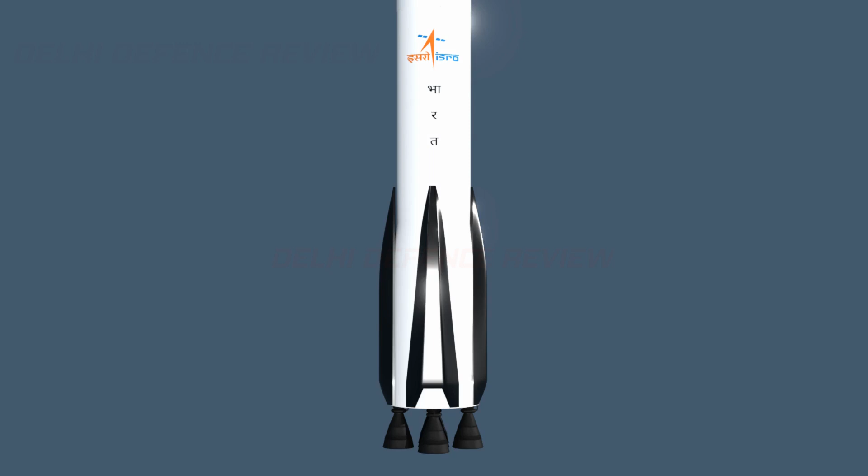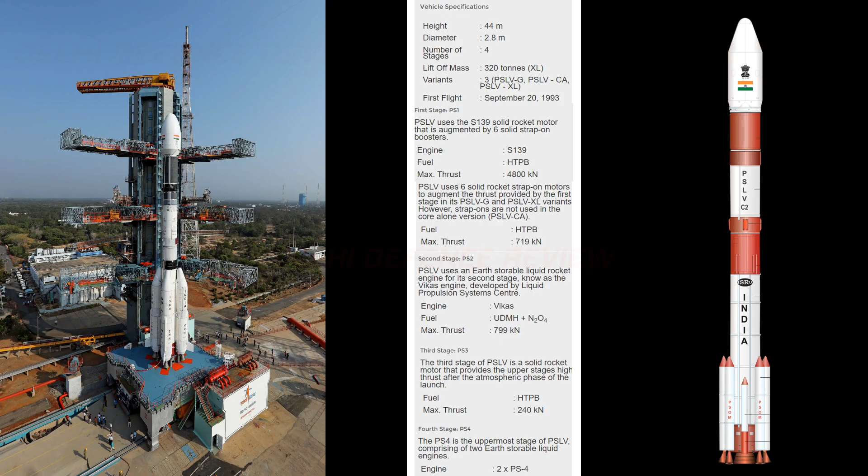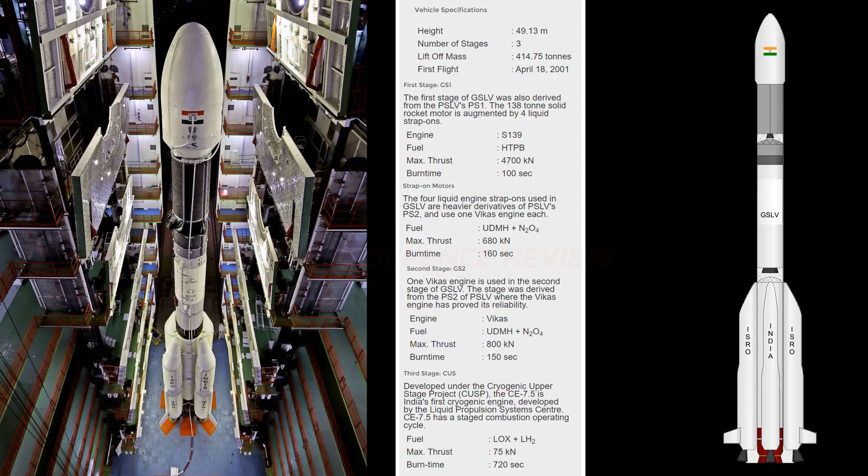India's current satellite launch vehicle workhorse is the PSLV, or Polar Satellite Launch Vehicle, which can launch 1.7 tons to SSPO orbit. On the back of successful development of cryogenic engine technology, the GSLV, Geostationary Satellite Launch Vehicle, has also emerged as a launcher that can place a payload of 5 tons to low Earth orbit (LEO) or 2.5 tons to GTO. The cryogenic upper stage in the GSLV has a CE 7.5 engine which burns liquid hydrogen with liquid oxygen to generate 75 kilonewtons of thrust.

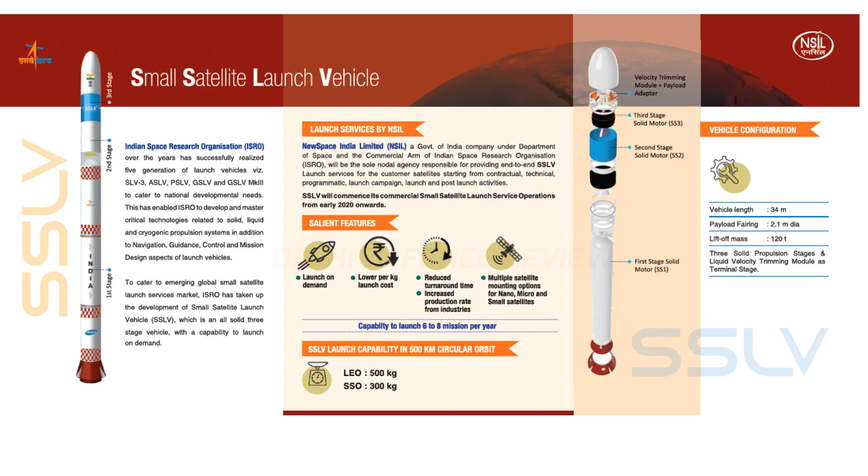ISRO will also start launching satellites using the Small Satellite Launch Vehicle, SSLV. This 3-stage solid rocket motor propelled launch vehicle will be able to launch 500 kilos into LEO and 300 kilos into SSO on demand at a very low cost. It will cater primarily to the global small, micro and nanosat market.

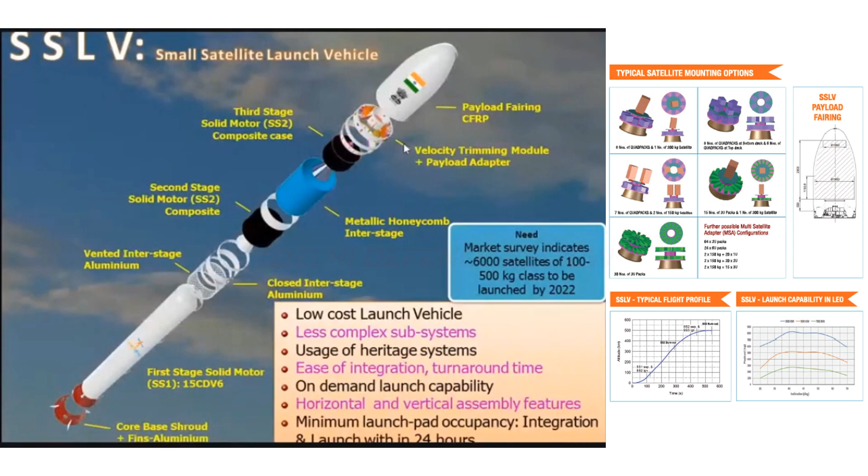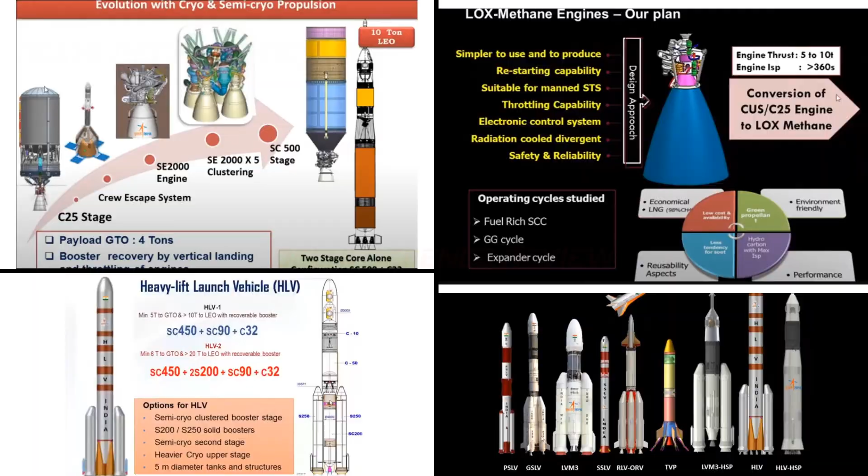Going forward, ISRO plans to develop new engines and heavier launch vehicles, with a plan to launch more than 10 tons to LEO. TSTO, or two-stage to orbit, has been the goal for many launch agencies. Launching payloads and then returning to Earth, where they will be refurbished within a short period and then reused, has been the aim for next generation launchers.

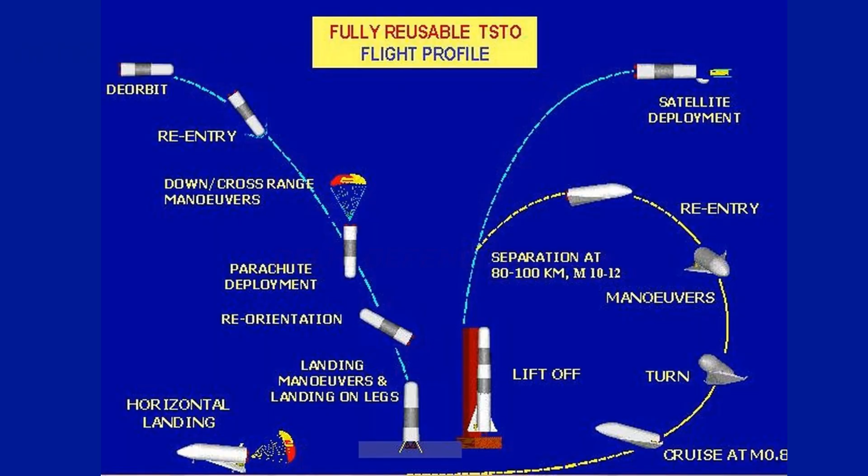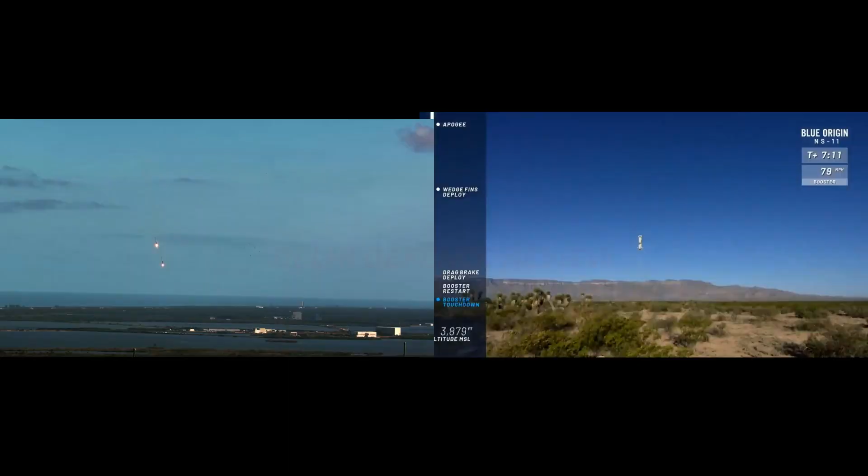Private companies have taken a lead in the area of reusable launch vehicles, with SpaceX's Falcon 9 as well as Blue Origin's New Shepard, which have proven boosters that return to land, which can be serviced and reused.

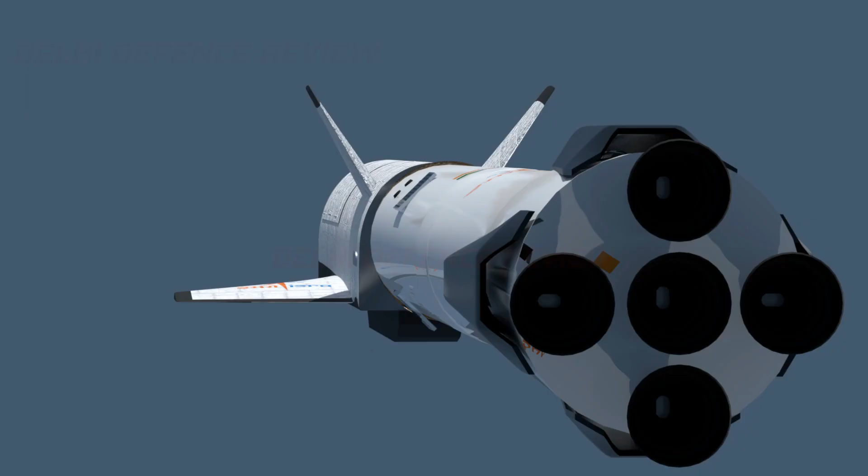Among the multiple plans studied in ISRO for a full-fledged reusable launch system, one of them is this configuration. It is a two-stage system with a first stage called Admire that will return to the ground after stage separation, seemingly similar to the SpaceX Falcon 9's first stage. And the second stage will be the full-scale wing body vehicle, the RLV.

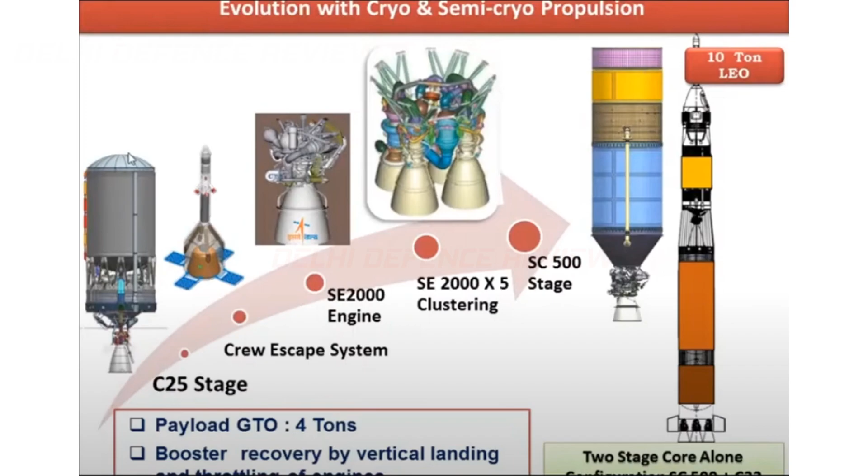ISRO hasn't yet finalized the configuration for the RLV, but the front runner is this one. It will be powered by a reusable semi-cryo SC500 engine with a 500-ton propellant loading of LOX kerosene combination, and a cryogenic orbiter with a C50 engine, with the top portion landing separately using thrusters or parachutes. The aim is to deliver a payload of 10 tons to low Earth orbit.

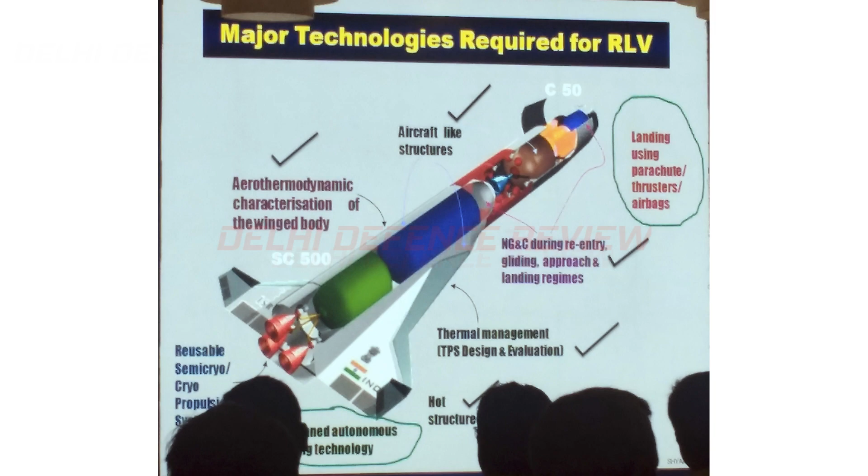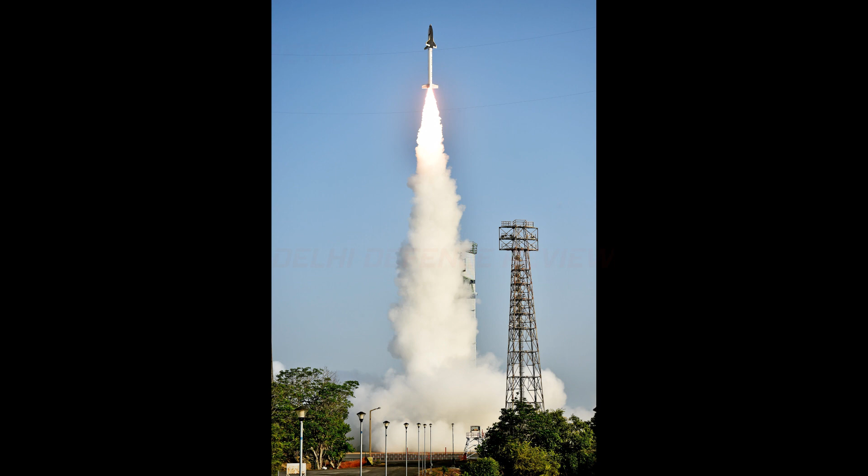ISRO began working on a scaled-down wing body technology demonstrator testbed called the RLV-TD to develop critical technologies required to build a reusable launch vehicle. This TD would enable studies on hypersonic aerothermodynamics of a wing body, evaluation of thermal protection systems and hot structures, as well as re-entry guidance, navigation, and control.

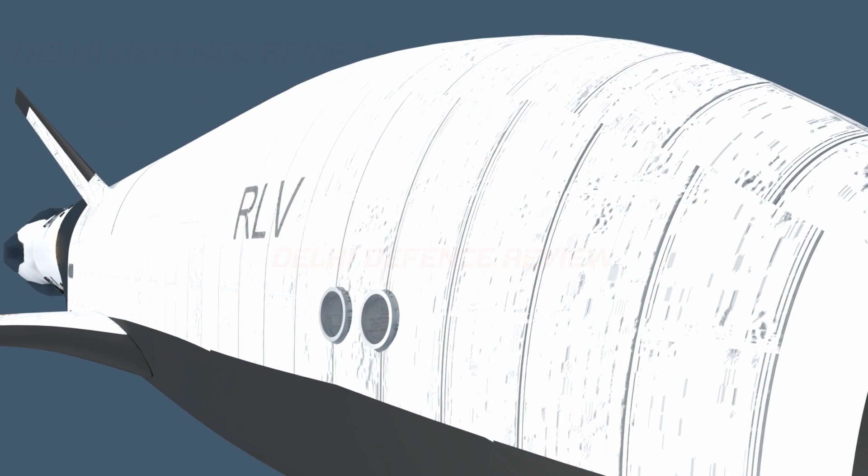ISRO planned to perform test flights to evaluate these technologies developed for the RLV with a hypersonic flight experiment (HEX), landing experiment (LEX), return flight experiment (REX), and a scramjet propulsion experiment (SPEX).

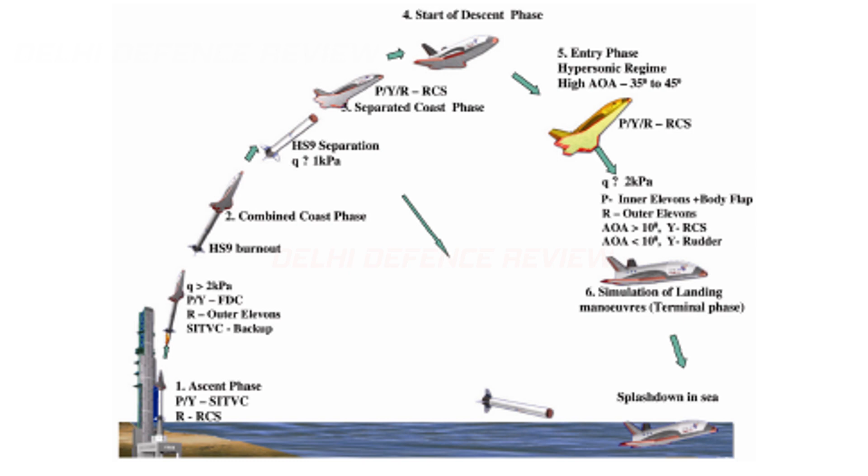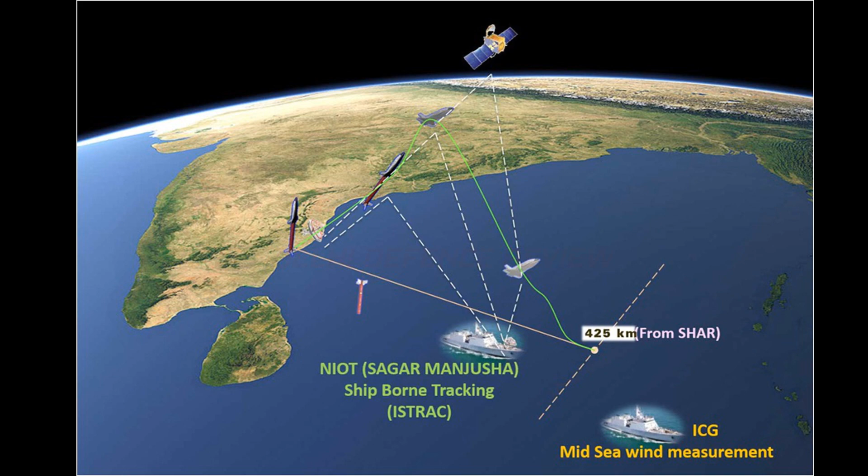ISRO conducted the hypersonic experiment on May 23, 2016 from Sriharikota. After a vertical rise to clear the tower, the vehicle followed an optimum wind-biased gravity turn trajectory till booster separation. The booster burnt out at 96 seconds at 33 km altitude. After burnout, the booster and the TDV continued in a combined coast till the dynamic pressure fell sufficiently to allow for a safe separation at around 44 km.

After separation, the TDV continued its unpowered coast to a peak altitude of 65 km and then started the descent mission. During descent, the vehicle flew in a predetermined optimum Mach versus angle of attack program till it reached Mach number 2 at around 20 km, from where the closed loop guidance took over and a safe touchdown in the Bay of Bengal around 425 km from Sriharikota was achieved.

The TD performed hypersonic flight and then a simulated landing at a height above the water surface, sending back images prior to hitting the water. Let's take a closer look at the TD now.

Some of the key challenges in arriving at a configuration for the TDV were meeting a required lift to drag ratio at hypersonic to low subsonic Mach numbers with a wide range of angles of attack, to limit the deceleration levels and wing loading, as well as achieving sufficient downrange and cross-range control. Longitudinal, lateral and directional controllability using control surfaces, elevons and rudder, in the high dynamic pressure region. Reasonable lift to drag ratio at low speeds to limit sink rate before landing.

Leading edge heating, as well as minimizing the center of pressure movement with change in Mach number. Sizing fin during ascent and ensuring controllability in all axes. A flat fuselage surface on the windward side allows placement of tiles and possible air-breathing engine integration in future. Sufficient fuselage volume to accommodate all subsystems was a given.

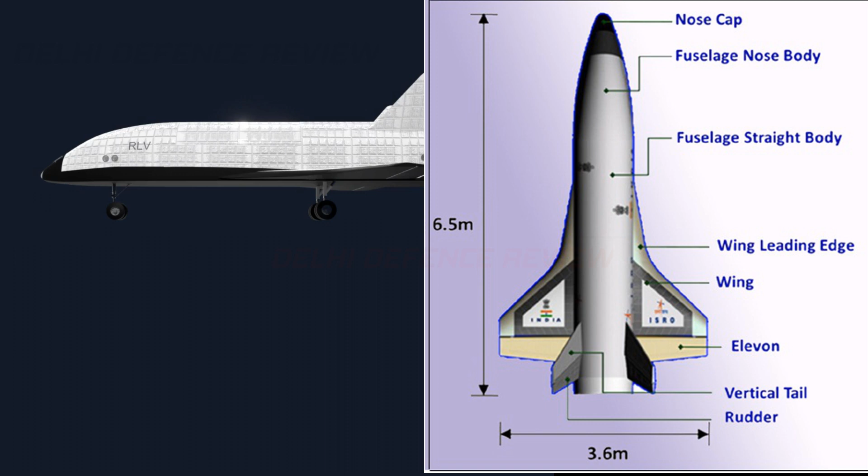The TDV is an 1800 kg wing body with double delta wing having a hypersonic L/D ratio of 2.5. The TDV configuration was arrived at after 2 years of studies and design work. The wing body configuration was selected to provide high aerodynamic efficiency. Lifting bodies have low lift to drag ratio and hence low cross and downrange gliding ability. On the other hand, wing body configuration has high L/D ratio in subsonic as well as hypersonic speeds, which gives better cross and downrange gliding ability.

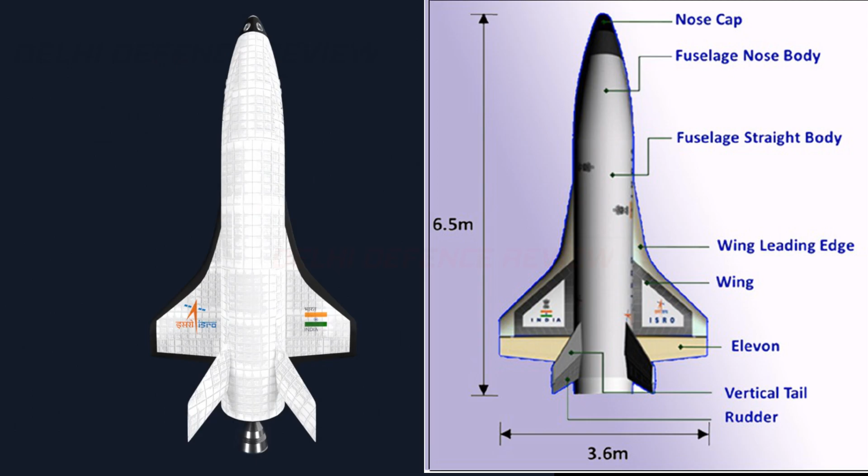Many configurations with a single fin were considered initially, akin to the Space Shuttle. A fuselage with ogive shaped forebody, low aspect ratio double delta wing, and a single vertical tail was the first configuration for which extensive wind tunnel testing was carried out. A drooped nose was designed to facilitate a future manned requirement if needed.

Detailed assessment of each configuration and aerothermodynamic characterization was carried out using in-house developed engineering methods, computational fluid dynamics tools, and national wind tunnel facilities.

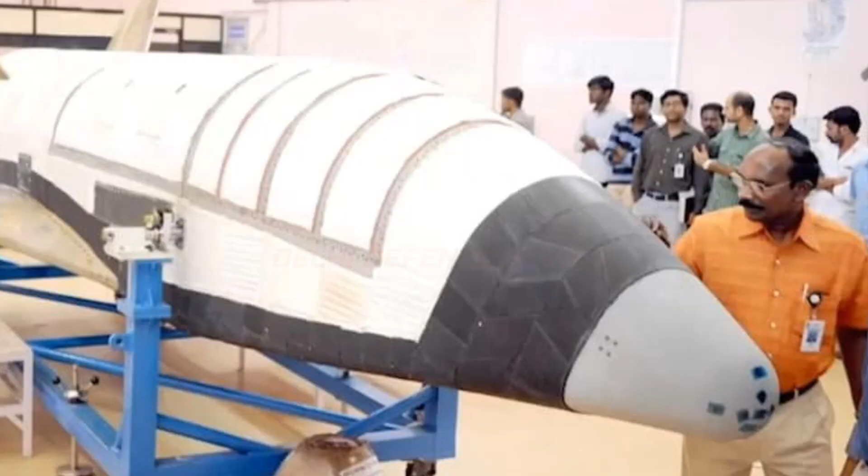For better longitudinal stability and reduced directional instability in supersonic and hypersonic regime, a blunt, canted ogive nose cone was chosen for the forebody. Elevons, which combine the function of elevator and ailerons, perform pitch and roll controls.

At high angles of attack, a single vertical tail was found to be directionally unstable. So twin, swept canted vertical tails with double wedge airfoil section was chosen to improve directional stability and controllability at high angles of attack. The rudder also acts as a speed brake and for pitch trim during supersonic speeds, similar to the Su-30 MKI.

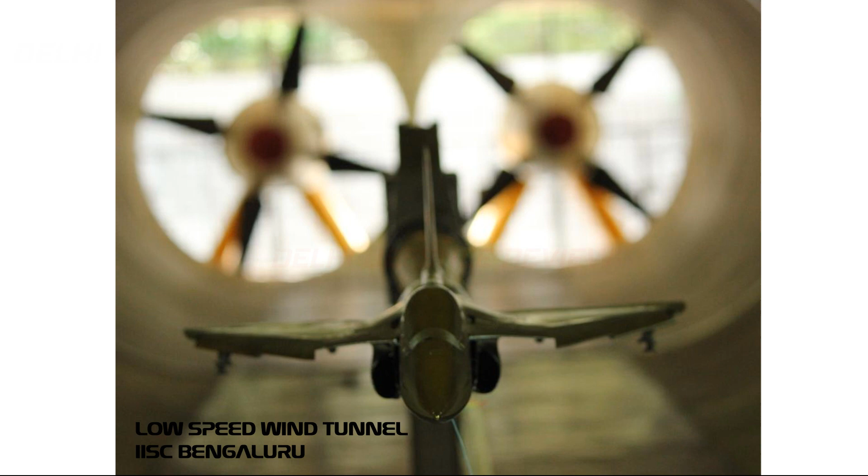For RLV characterization, a 3 meter by 2.5 meter low subsonic speed continuous wind tunnel at IIT Kanpur, a 4.27 meter by 2.74 meter low speed wind tunnel at IISc Bengaluru, a 1.2 meter trisonic wind tunnel at NAL Bangalore, and 0.25 and 1 meter hypersonic wind tunnels at VSSC Trivandrum were used.

17 scaled down models were fabricated and tested.

The wing airfoil was derived from NACA 0012 with flat bottom surface. The reflex airfoil is S-shaped with negative camber for the aft 20% of the chord length, to reduce the pitch down moment and bring it close to zero about the aerodynamic center. The airfoil thickness to chord ratio was varied from 10 to 12% from root to tip of the wingspan.

The wing planform area was reduced without sacrificing lift requirements. The wing has a double delta planform with 80-degree leading edge strake angle and 45-degree main wing leading edge angle. The 80-45-degree wing planform delays the wing stall and reduces the center of pressure movement over the operating range of Mach numbers. The wing has an aspect ratio of 2.16.

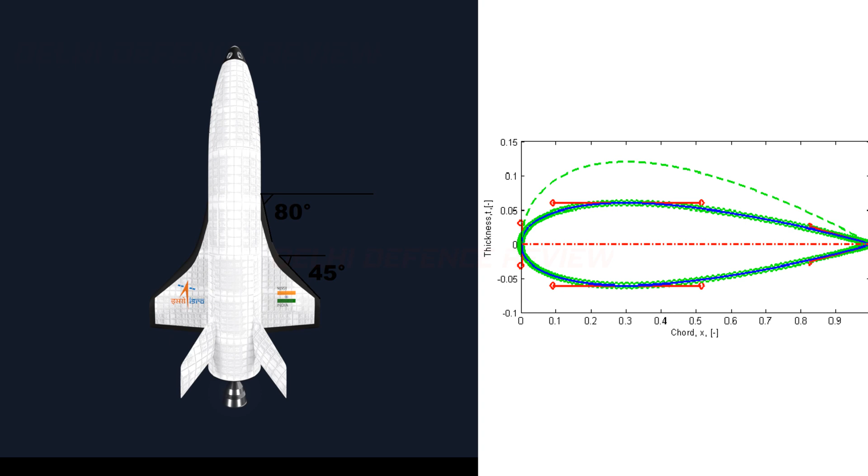A 3-degree dihedral angle means the wing tip section is at a higher level than the wing root section, and the wingspan is 0.55 times the vehicle length.

Reaction Control System (RCS) thrusters provide 3-axis control during low dynamic pressure conditions. Pitch RCS thrusters are placed in the aft fuselage top and bottom surfaces, yaw thrusters at the aft fuselage side panels, and roll RCS thrusters in the top and bottom surfaces of the wing.

The fuselage has a blunt ogive forebody followed by a D-section fuselage. The D-section with semicircle top and a box-type bottom makes TPS, Thermal Protection System, tile application easy. It also allows for a blended low wing design which reduces aerodynamic heating.

The TDV was statically stable in the operating angles of attack ranging from Mach 2 to low speeds, whereas it was statically unstable at higher Mach numbers. The vehicle was directionally stable with positive C_n_beta from low speeds up to low supersonic Mach number, above which it was directionally unstable. This characteristic was similar to the observations for the Space Shuttle as well as the X-34.

To cater to such stability, switchover flight control was through the deflection of elevon from stage separation up to touchdown, and the rudder was used in the high dynamic pressure phase of descent flight.

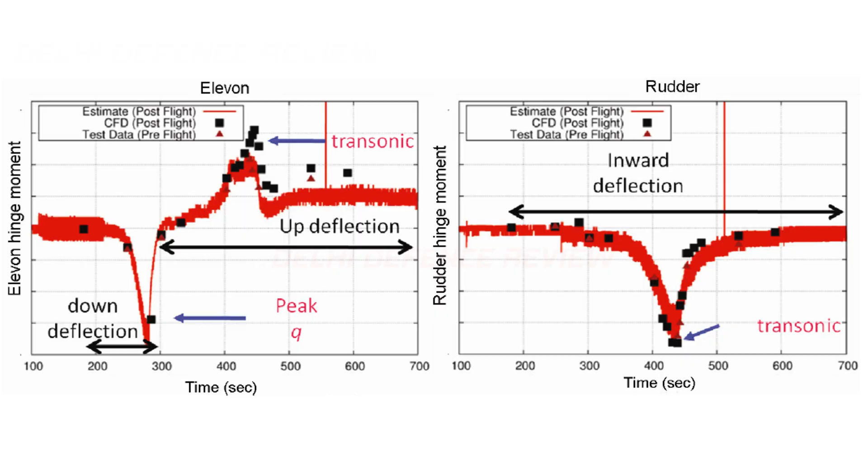Intense heat generated during flight is dissipated by heat sinks, where a high thermal conductivity material absorbs the heat and distributes it quickly and uniformly away from the part of the spacecraft it was designed to protect.

Active cooling: in high heat flux areas, fluids can be used as a liquid or gaseous heat sink when distributed to hot sections via a cooling loop. The proposed cooling fluids include liquid metals like sodium or potassium, as well as gaseous hydrogen cooling.

Transpiration cooling involves ejection of a fluid or gas through a porous skin into the boundary layer between the heat flux and the surface, thus reducing the adiabatic wall temperature of the surface.

Radiation cooling: most of the heat flux is reflected back towards the black body of space by a high emissivity coating on the protected substrate.

And finally, ablation. It is an effective mechanism of minimizing total energy that the vehicle absorbs. Heat is expended in a material phase change rather than being conducted to the interior of the vehicle.

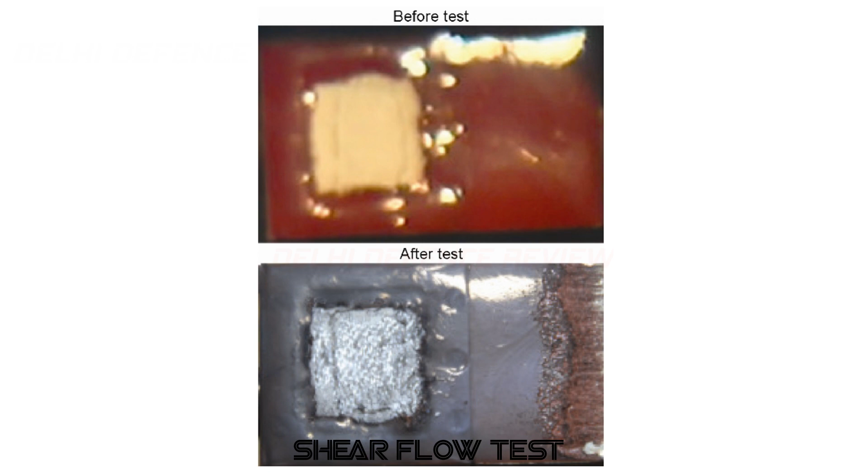Thermostructural, infrared heating, shear flow, and plasma wind tunnel tests were carried out for qualifying the hot structures as well as TPS. Materials and their thicknesses were designed for various parts to meet temperature constraints based on simulation of 3D thermal response. Nose cap, wing leading edge, elevon, vertical tail, and rudder were designed as hot structures which use TPS like silica tile and flexible insulation used in the space recovery experiment.

The carbon-carbon nose cap of the RLV is attached with an aluminum alloy ring through molybdenum bracket, molybdenum bolt, and a molybdenum nut. These are dissimilar metals having different coefficients of thermal expansion which have been attached. It was necessary to ensure that this interface stood up to the temperatures faced during re-entry.

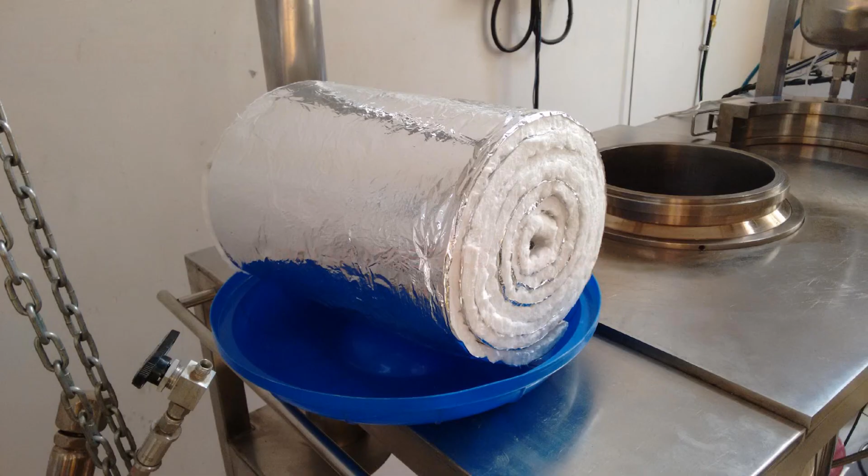The airframe is formed primarily from aluminum alloy that can withstand up to 350 Fahrenheit without softening. Re-entry causes surface temperature of greater than 1000 degrees centigrade. To protect this frame, flexible thermal protection material is used on the leeward region where the surface is curved. This has silica cloth layers on either side with FRSI blanket felt sandwiched and stitched together using quartz thread.

A ceramic coating for thermal protection was also developed. Room temperature curability, ease of application, minimum weight, durability, erosion resistance, stable optical characteristics, easy repairability, non-contaminating, high purity, and high temperature compatibility with silica fabric were key considerations during development. Silica binder and silica powder were used for the coating.

An FEI blanket was supplied by Advanced Materials and Ceramics Division, VSSC, which was waterproofed and bonded by Polymers and Special Chemical Division before applying the ceramic coating.

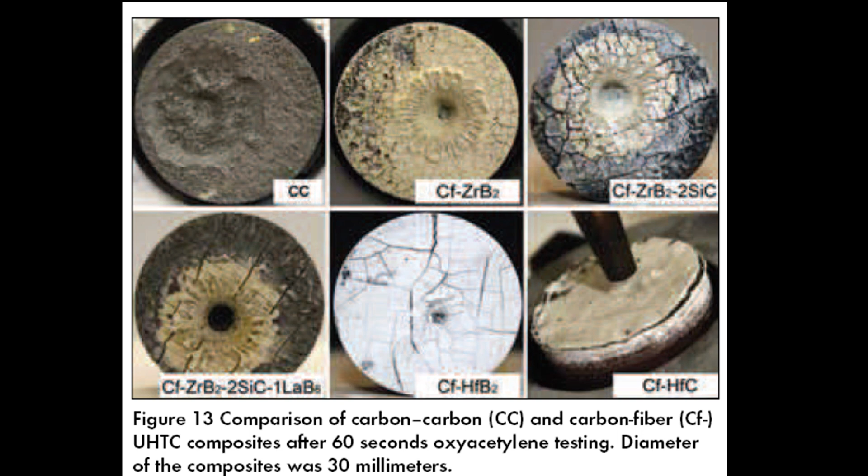Composite ultra high temperature ceramics (UHTC) are being developed to replace the silica tiles being used for the RLV. Zirconium diboride (ZrB2), hafnium diboride (HfB2), and silicon carbide composite materials, which possess high thermal conductivity, thermal shock resistance, high temperature mechanical properties, and oxidation resistance, are the prime candidates. These composites can withstand temperatures around 2000 degrees centigrade and will be used for hypersonic vehicles like the RLV.

Beryllium-rich aluminum alloys are also being developed to replace current aluminum alloys due to their promising features like lightweight, high thermal conductivity, high specific stiffness, etc.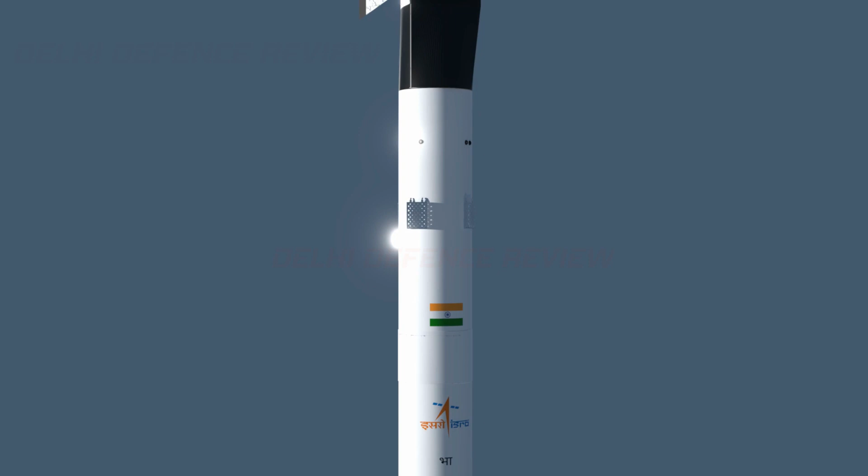The vehicle experiences the flight environment of an upper stage in a launch vehicle during its ascent phase, and then the flight conditions of an aircraft during its descent phase. The structural design of the RLV airframe demands an approach similar to that of aircraft design, while also taking care of the aerothermal environment of the hypersonic re-entry regime.

The external envelope for the fuselage, wing and vertical tail is defined based on aerodynamic considerations and mission profile for the wing and vehicle. Critical loading events such as transonic, maximum dynamic pressure, and longitudinal acceleration are defined by mission, as in launch vehicles. To avoid TPS tiles from debonding, panels of the vehicle need to have a deflection restricted to a maximum of 1 mm for a given tile width.

The vehicle also needs access points for subsystems and joints. The external profile needs to be smooth since the vehicle will be traveling at hypersonic speeds. Weight is always a constraint on all vehicles, and especially for hypersonic flying vehicles, to ensure adequate Mach number is achieved as well as for stability.

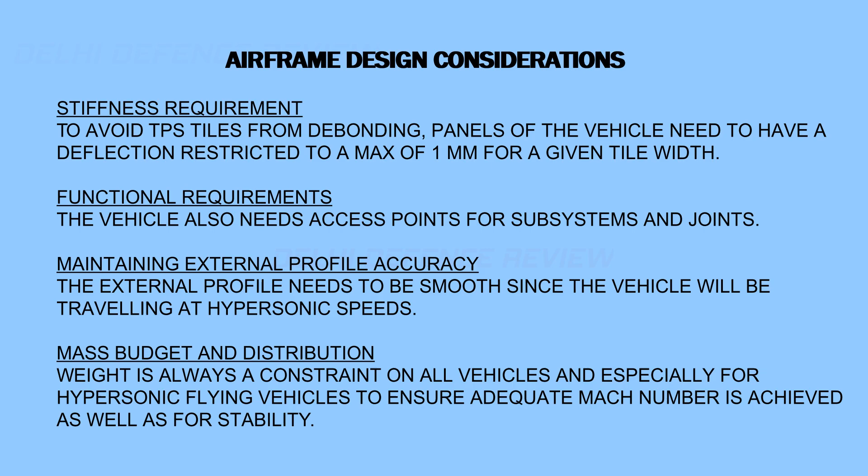The fuselage, wing and vertical tail are the main structural members, and elevon and rudder the control surfaces. Features like stiffness, stability, integration requirements, and manufacturing feasibility drive the design of structural members, that is, the positioning of bulkheads, longerons, spars, and ribs in the fuselage and wing.

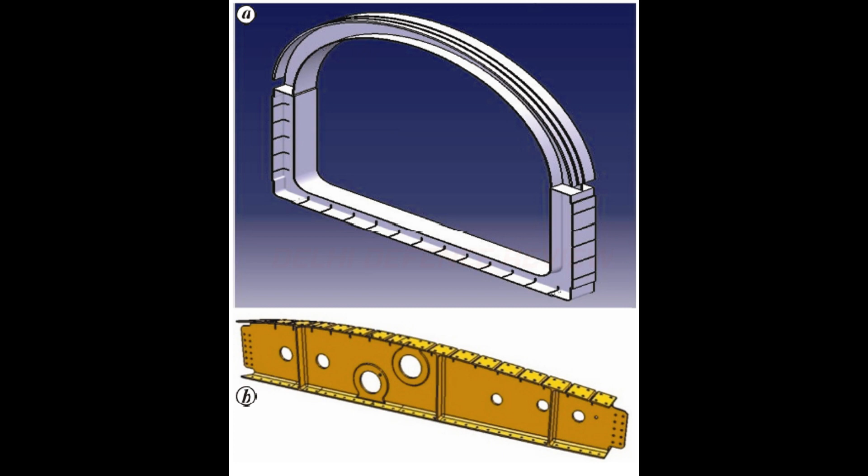The vehicle is made up of integrally stiffened panels due to their efficiency, weight savings, and lower number of joints in assembly. Bulkheads and longerons are positioned considering the interfaces for wing and vertical tail in the fuselage.

The RLV wing contains 2 spars and 4 ribs, top and bottom panels, and wing-to-fuselage attachment lugs. Spar spacing was derived based on leading edge chord length at the front spar, and control surface chord length at the rear spar, and the landing gear for future vehicles.

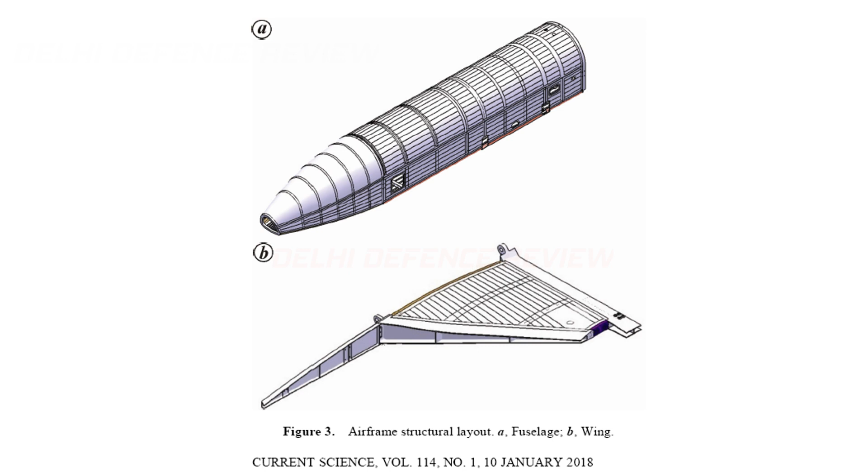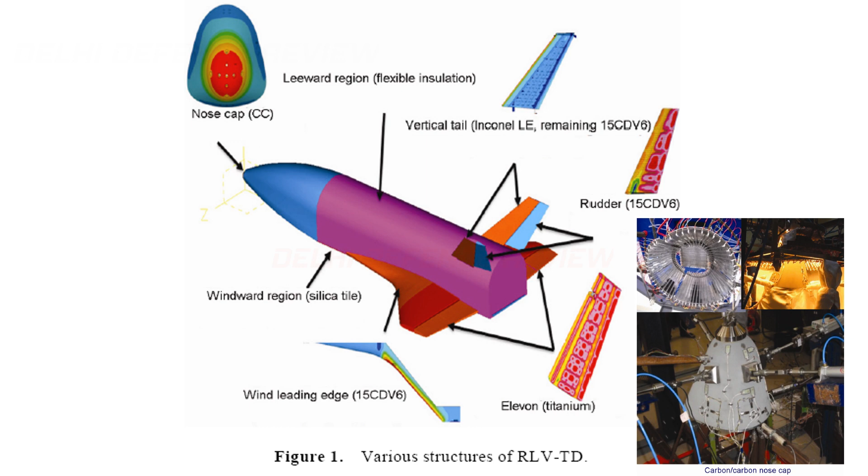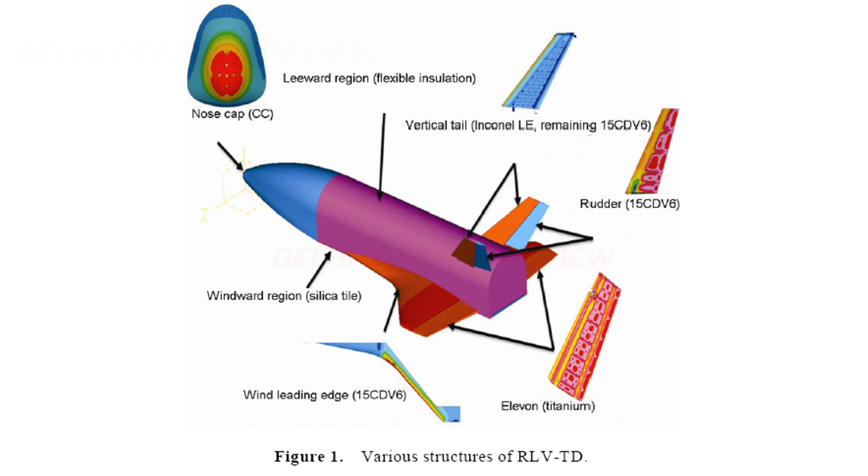Fuselage and wing, as I said earlier, are made of aluminum alloy which has a high specific strength, stiffness and easy manufacturability. Nose cap is again made of carbon-carbon composite with a silicon carbide coating. Vertical tails and rudders are of 15 CDV6 steel with their leading edge made of Inconel 718. Elevons are made of titanium alloy, and the leading edges of wings are made with 15 CDV6 steel.

Flight of the TDV is controlled by the navigation guidance and control system. The navigation system design is based on the accuracy requirement during the landing phase. Since the RLV will land autonomously, positional accuracy of 50 meters along the runway and 5 meters across is needed. Altitude accuracy of 1 meter and a velocity accuracy of 0.5 meter per second is also needed.

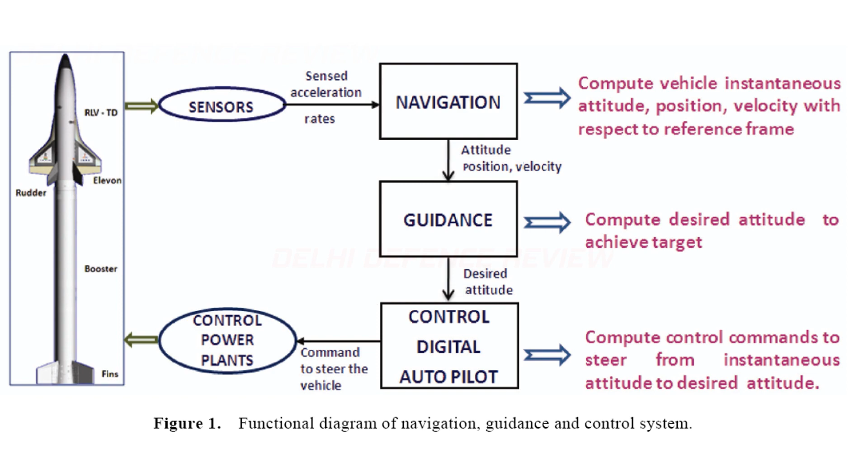The MMC, the Mission Management Computer, computes navigation information from sensor data and generates steering, control and sequencing commands. Control commands are routed through the stage processing system to the actuators through the control electronics package. NGC is a dual redundant cross-strapped system to handle subsystem failures. Communication between MMC and other elements is via a MIL standard 1553 bus.

Inertial Navigation System INS along with Global Positioning System GPS aided navigation system GAINS, which provides position and altitude accuracy of 50 meters and a velocity accuracy of 0.5 meter per second, is used. During landing, a radar altimeter is used which gives an altitude accuracy of 1 meter.

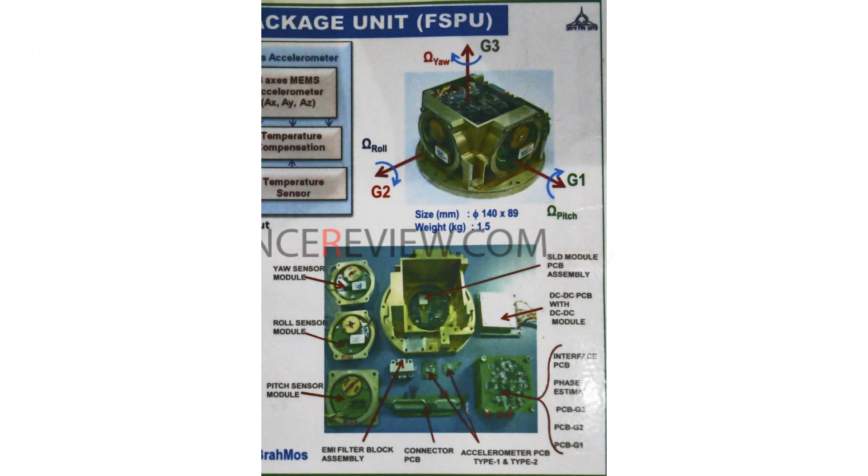The INS is made of 3 accelerometers along the 3 orthogonal axes, and 2 accelerometers in the roll-yaw plane provide fail operational redundancy in yaw and roll axes. The onboard computer processes the data from inertial sensors for closed-loop guidance and control. It computes body rates in quaternions, position, velocity and attitude, inertial velocity and acceleration, and air data parameters.

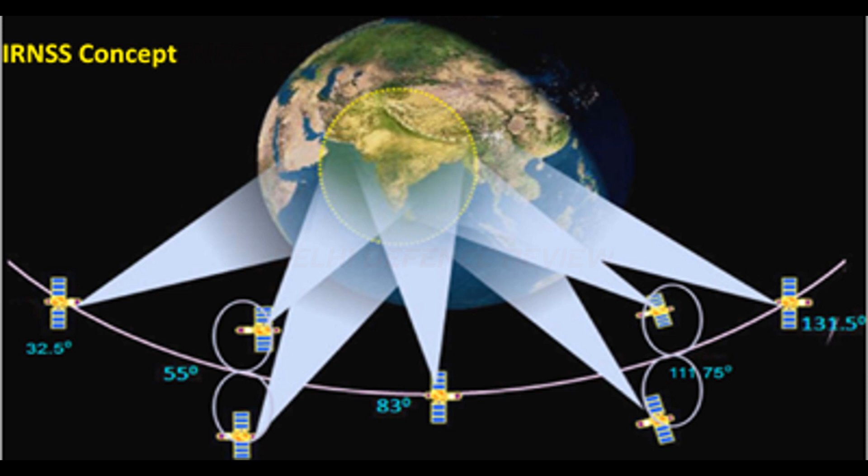To improve accuracy over INS-based navigation, a GPS is used via a GAINS computer that works with the mission management computer. Wind profile data is recorded prior to launch and is used with atmospheric properties and aided navigation data to derive air data parameters, that is the angle of attack, side slip angle, bank angle, dynamic pressure, relative velocity, and Mach number. During descent, wind effects are prominent and estimation of air data parameters is less accurate.

A ceramic servo accelerometer package, which consists of 6 ceramic servo accelerometers mounted in skewed triad hexad geometry, is used. The data from the CSAP is used by the MMC to generate lateral acceleration numbers. During landing, the radar altimeter is used to correct any error in altitude.

An FADS, or flush air data sensing system, is a mission critical subsystem where orifices which are flush with the surface of the vehicle are used. It makes use of surface pressure measurements from the nose cap of the vehicle for deriving air data parameters such as angle of attack, side slip angle, Mach number, etc.

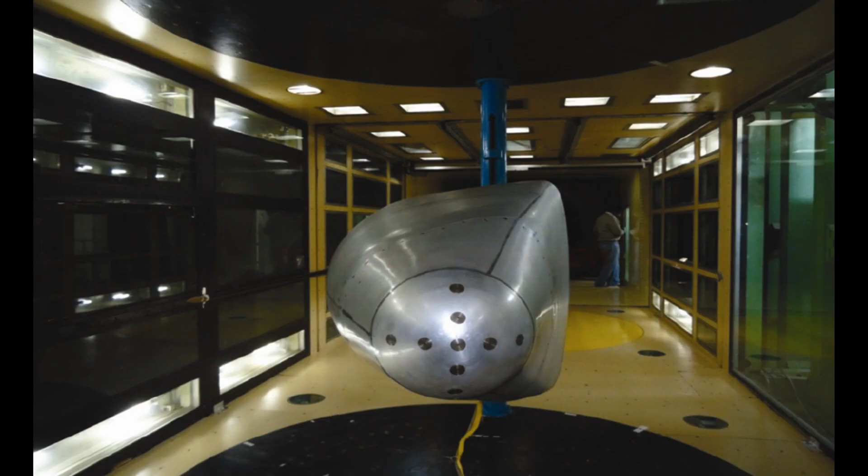The work done for the FADS for the RLV will be carried over and developed further for use in the next gen stealth fighter AMCA.

The guidance and control system demands an accuracy of less than 1 degree for these parameters. The Mach number and dynamic pressure are used by the control system for gain scheduling and also for switching of control to the aerodynamic control surfaces. The accuracy demanded in Mach number and dynamic pressure for meeting the present performance is less than 5% of the measured value.

FADS enables sensing of more pressure measurements than minimally needed to determine the flow angles and also to minimize the pressure measurement error used in the estimation of these parameters. In general, FADS is intended to work at altitudes below 35 to 40 kilometers. The low magnitude of the nose cap pressure limits usage of FADS at higher altitudes.

The guidance and control system of re-entry vehicles mainly relies on air data parameters derived from the INS for altitudes above 40 kilometers. These estimates tend to be erratic at lower altitudes due to wind effects and other errors of the navigation system used for deriving these parameters. For example, side slip angle estimated using the INS system can be significantly different from the true side slip angle in the presence of crosswinds.

The erroneous side slip angle, when fed back to the flight control system, can severely affect flight dynamics of the re-entry vehicle. Therefore, the exclusive use of inertial measurement systems for air data computations can lead to significant limitation in the performance of the vehicles under typical operation conditions, especially at lower altitudes.

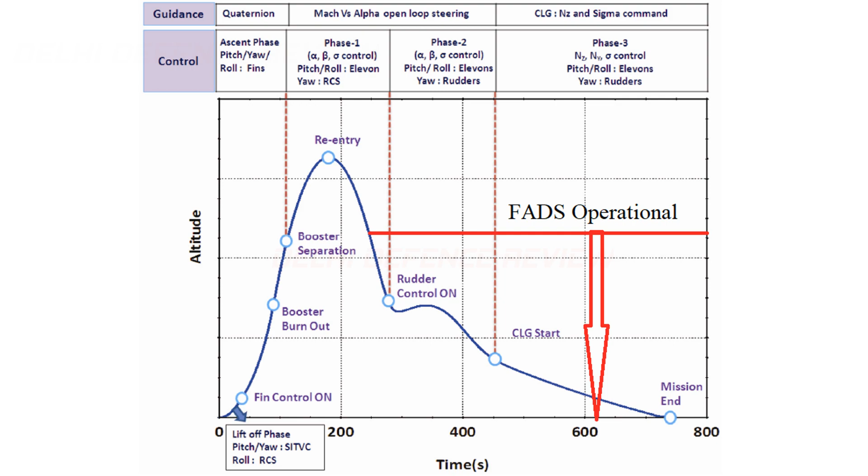The measured pressures are a function of free stream static pressure, impact dynamic pressure, local angle of attack, and side slip. Since there are 4 air data states and a calibration parameter to be estimated, at least 5 independent pressure measurements must be available to derive the entire set of data.

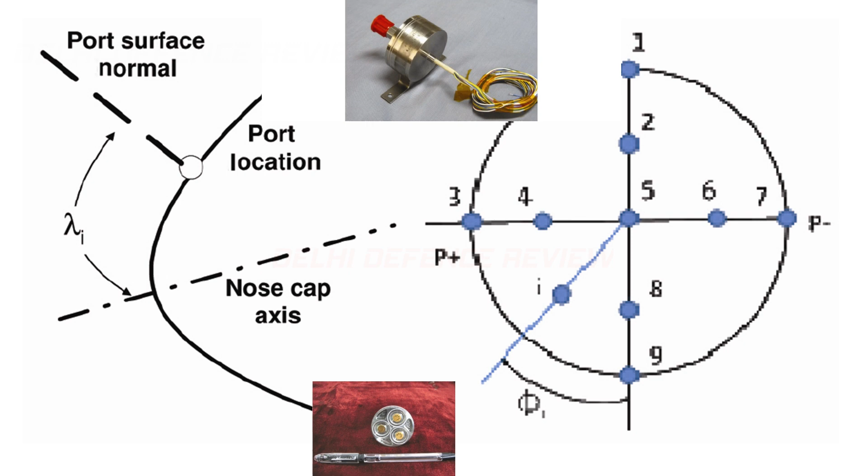This puts the minimum number of pressure ports at 5. Even though the minimum number of ports is 5, a configuration with a total of 9 ports was selected. This was done to provide adequate redundancy and to facilitate computation of parameters even after failure of a pressure sensor.

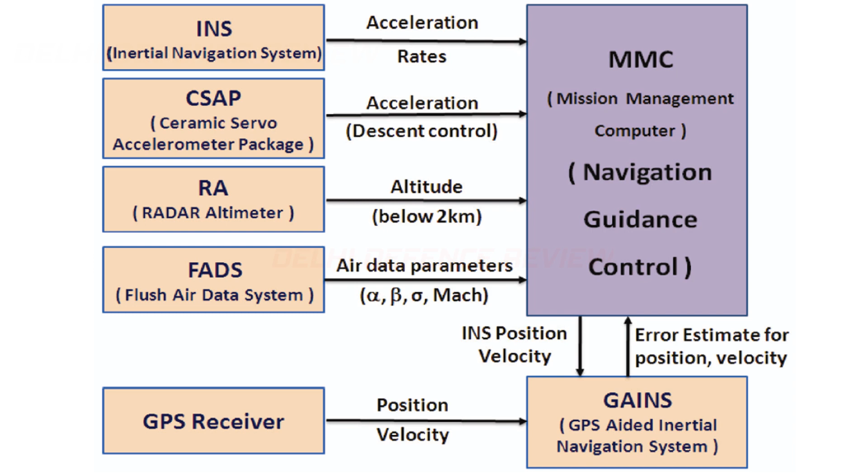The pressure ports are arranged in a cruciform fashion, with 5 ports in the vertical and the 4 remaining in the horizontal meridian. Air data parameters are needed by the onboard computer every 20 milliseconds. The electronics performing this computationally intensive algorithm for generation of air data parameters makes use of a digital signal processor.

Let's take a look at the guidance and control of the TDV itself. During ascent, the TDV is similar to a conventional launch vehicle, where attitude-based open-loop steering with a pre-stored profile is used. The vehicle coasts for a fixed time after booster burnout to achieve the favorable dynamic pressure for separation.

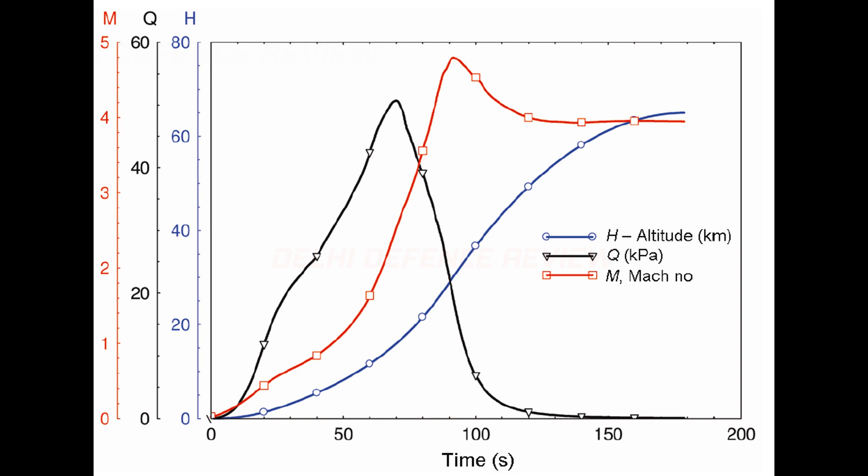After booster separation, the TDV continues ascent flight and reaches a peak altitude. During this regime, the guidance orients the vehicle's angle of attack from 0 degrees to a predefined value at a constant rate. Side slip and bank angle are commanded to 0 degrees.

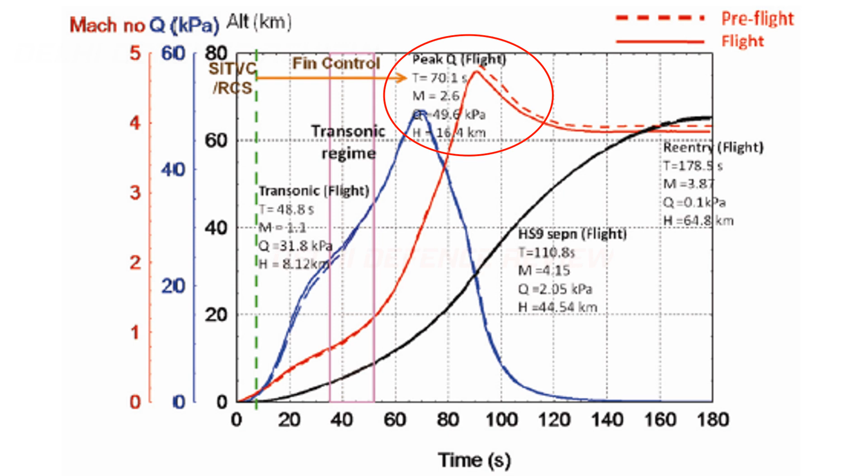Attitude control during the liftoff phase in pitch and yaw is achieved using secondary injection thrust vector control (SITVC) systems, and roll by reaction control systems (RCS). Once the dynamic pressure builds up, pitch, yaw and roll control are achieved by deflecting the fins driven by electro-hydraulic actuators.

In the re-entry phase, the angle of attack is commanded using a predefined Mach number versus angle of attack profile stored onboard. This profile is generated meeting constraints such as dynamic pressure, heat flux, load factor, and trim capability. Side slip and bank angle are commanded to 0 degrees.

Below Mach number 2, the vehicle is commanded with normal acceleration commands from the table stored onboard. The maneuvers in this phase are rate limited to a predefined Mach number based rate limit table. Pitch and roll control is achieved by 2 elevons, and yaw by 2 rudders.

Unlike conventional launch vehicles where pitch, yaw and roll plane dynamics are decoupled, in RLV it is highly coupled, and hence a multi-input multi-output design is used.

After booster separation, the TDV coasts and reorients itself for the approach. The TDV coasts to an altitude of 70 km. Elevons are used to control pitch and roll dynamics, and RCS is used to control yaw, as the high angle of attack renders the rudder ineffective.

At the end of reorientation, time-based gain scheduling is adopted as the angle of attack reduces and rudder effectiveness improves. In the next phase, once the rudder comes out of the shadow of the fuselage and becomes effective, it is used for active yaw control.

The TDV is then completely controlled using aerodynamic control surfaces, and RCS is used in backup mode. Two-dimensional gain scheduling based on Mach number versus dynamic pressure is used. The TDV experiences maximum heat flux at this point in flight.

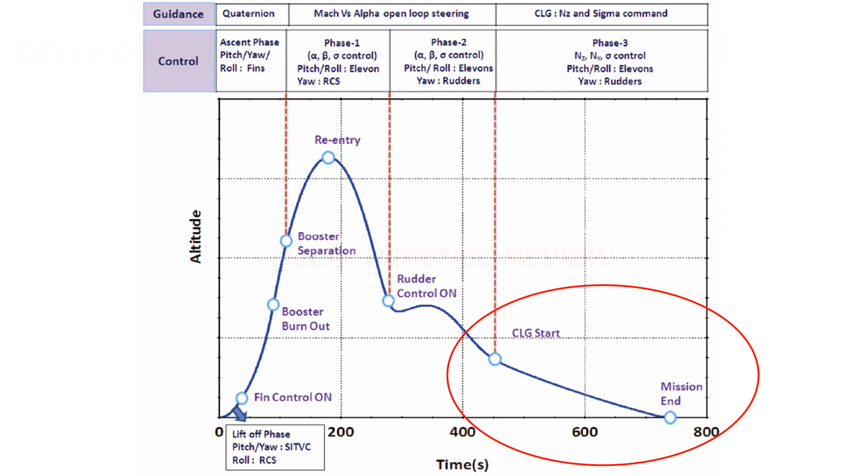In the approach and landing phase, closed-loop guidance commands are provided to steer the vehicle to a desired landing point. This is selected online based on the energy available. The approach and landing phase guidance includes an online trajectory design and a path controller to track the planned trajectory.

The entire approach and landing phase trajectory is generated onboard at the start of this phase. The trajectory is divided into horizontal and vertical planes. Vertical dynamics is controlled by commanding normal acceleration, and horizontal dynamics is controlled by bank angle commands.

The algorithm features include retargeting, such as online selection of landing point based on the range to be covered, safe mode guidance for extreme performance variations, and dynamic normal acceleration command limit to steer the vehicle to fly in a safe angle of attack envelope.

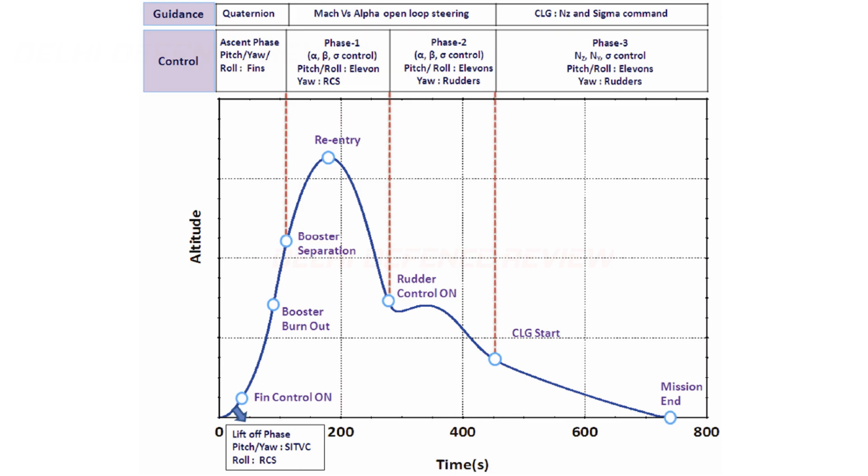At the start of this phase, Mach number reduces below 2 and altitude below 20 km. During this phase, wind velocities significantly influence estimation of aerodynamic angles. So in place of aerodynamic angles, acceleration is sensed and commanded by guidance for attitude control.

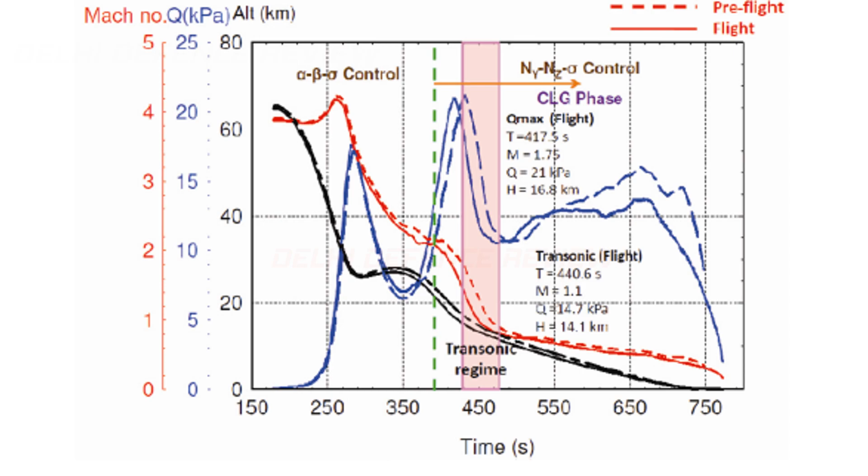Pitch plane design is done as in a conventional launch vehicle. All 8 electro-hydraulic actuators are powered from a common power source, the hydraulic power pack. A high power brushless DC motor is used to drive the hydraulic pump, and a high energy lithium ion battery unit is used to power this brushless DC motor.

A trajectory simulation software, SITARA, which stands for Software for Integrated Trajectory Analysis with Real-Time Applications, incorporating all features for validation of the NGC system and for mission performance analysis, was developed at ISRO. It simulates the 6 degrees of freedom, both translational and rotational motion of reusable launch vehicles, along with vehicle subsystem characteristics.

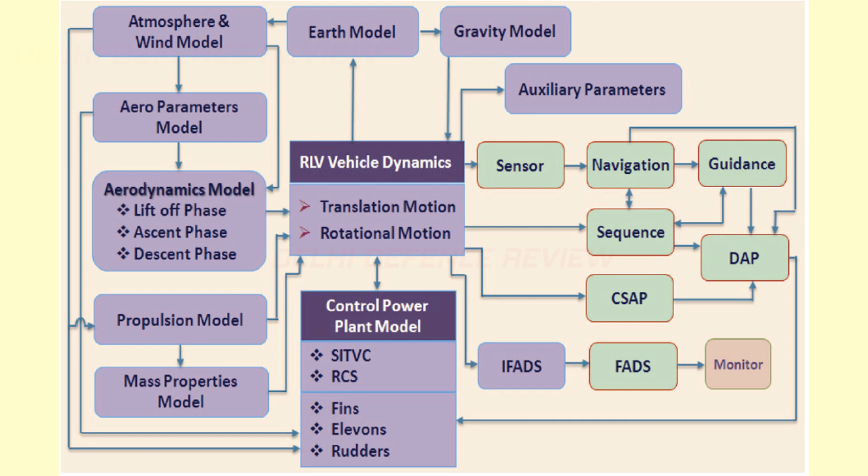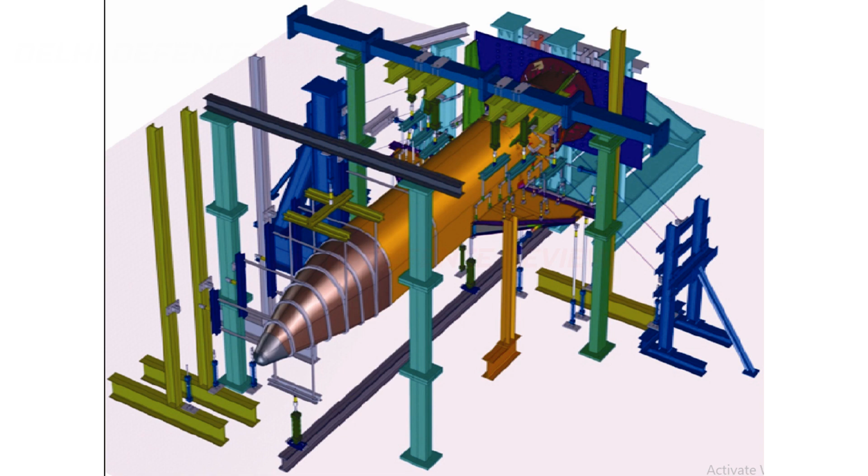The software simulates environmental conditions such as Earth's gravity, atmosphere and wind characteristics, and vehicle characteristics such as propulsion. A full-size representative system integration test rig known as Iron Bird was designed and built with the primary focus to validate flight actuation systems and associated electrical systems. The test segment reduces development risk by testing fully integrated systems prior to integrated vehicle level tests.

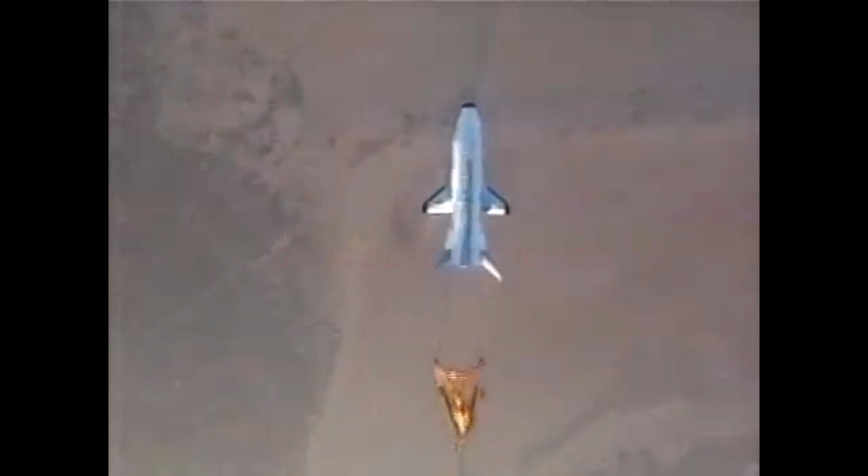The next flight of the TDV will be conducted at the Aeronautical Test Range in Karnataka. This test will provide guidance in automatic landing as well as landing gear deployment testing. It was planned for the last quarter of 2019 but has been delayed thus far. The TDV will be carried using a helicopter, likely a Chinook, and released at a distance of 4 to 5 kilometers from the runway with a horizontal velocity. The TDV will then glide and navigate towards the runway and land autonomously with its landing gear deployed.

At the airfield, the X-40, a scale test model of the Boeing X-37B, was tested similarly. A transport helicopter, again a Chinook, carried the vehicle and then dropped it from an altitude of 15,000 feet. The vehicle was able to navigate and land successfully on the main runway at Edwards Air Force Base.

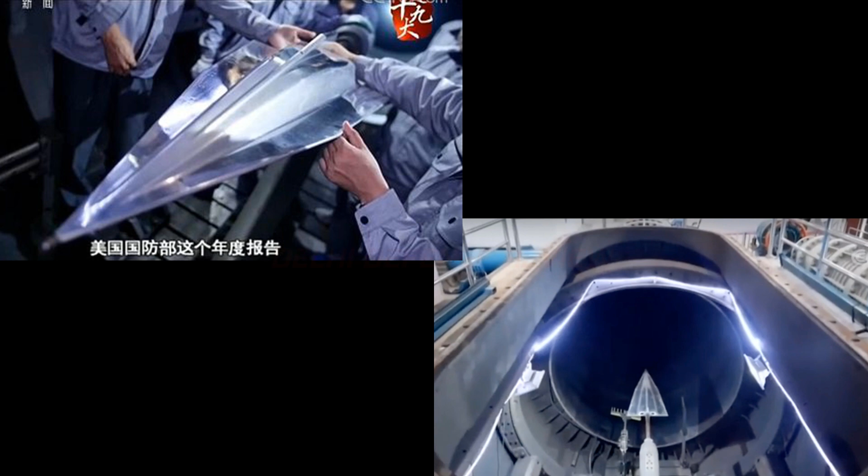The Chinese want to compete and surpass the Americans in all high-tech areas. They've been hard at work to obtain a TSTO solution on the back of their voluminous work on hypersonics, boost glide vehicles, which we'll cover in a future video.

China Aerospace Science and Industry Corporation, CASIC, is one of the big two Chinese aerospace conglomerates and China's main missile manufacturer. In 2016, one of the projects launched by them is the Tengyun, a reusable two-stage to orbit TSTO spaceplane with horizontal takeoff and horizontal landing. It is proposed to have a turbine-based combined cycle for the first stage.

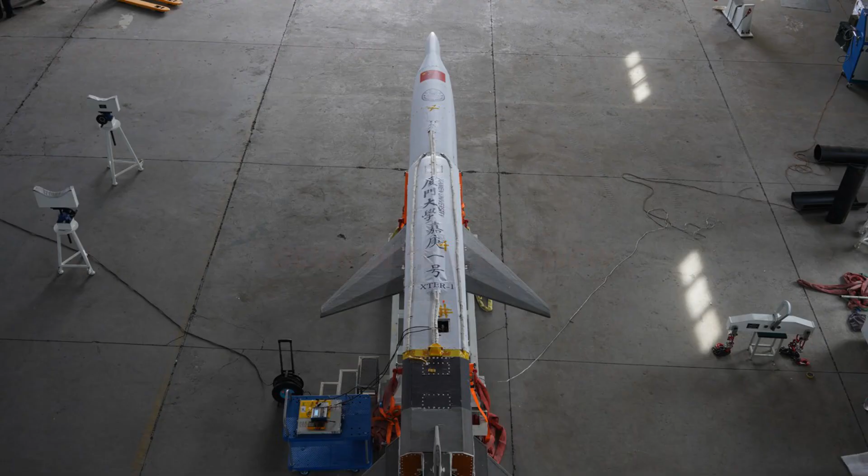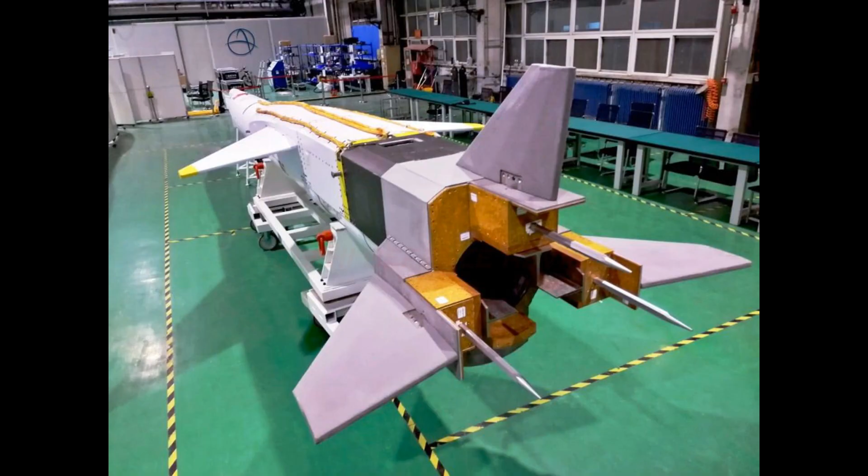University of Xiamen, in collaboration with the Chinese startup Space Transportation Company, tested the Jiageng 1, called a double waverider by a professor at the university because it rides two shock waves, one on its belly and the other in the air inlet duct for its ramjet engine. The 8.7 meter long Jiageng 1 has a wingspan of 2.5 meters and is part of the development of the larger future Tianxing 1 vertical takeoff horizontal landing reusable launch vehicle.

Yet another project is from the first research institute of the Chinese Academy of Aerospace and Aerodynamics, which conducted a wind tunnel experiment in which the second stage aircraft freely detaches from the first stage of a two-stage to orbit spaceplane. The first stage will provide power to the spaceplane upon takeoff, and when it reaches a certain height and speed, the second stage will detach from it and power itself further into space, and the first stage will just land like a normal plane.

Despite many statements from the Chinese that these programs are for peaceful purposes, there is a very strong dual nature aspect to them as well. Like the Boeing X-37B program, it is very likely that whichever Chinese program is successful, it will naturally be exploited in the intelligence and military domains as well. There's no point in beating around the bush.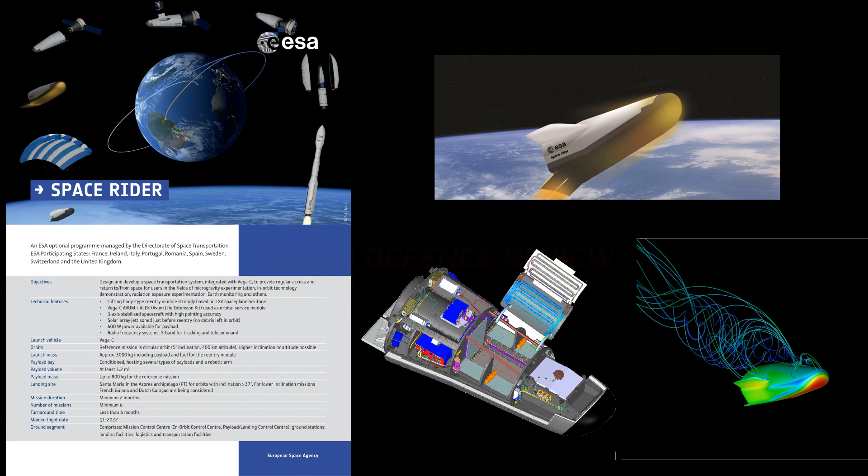Not to be left behind, the European Space Agency also has a similar program in the works called Space Rider. This vehicle has similar aims to provide reusable, reliable, low-cost space access.

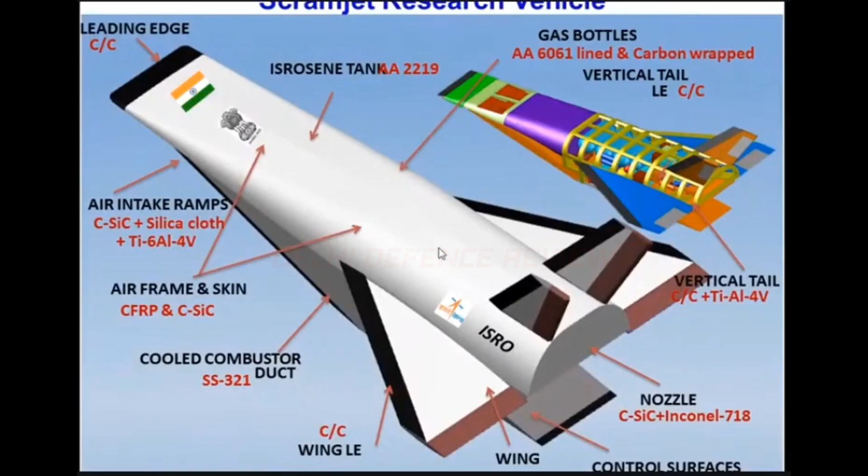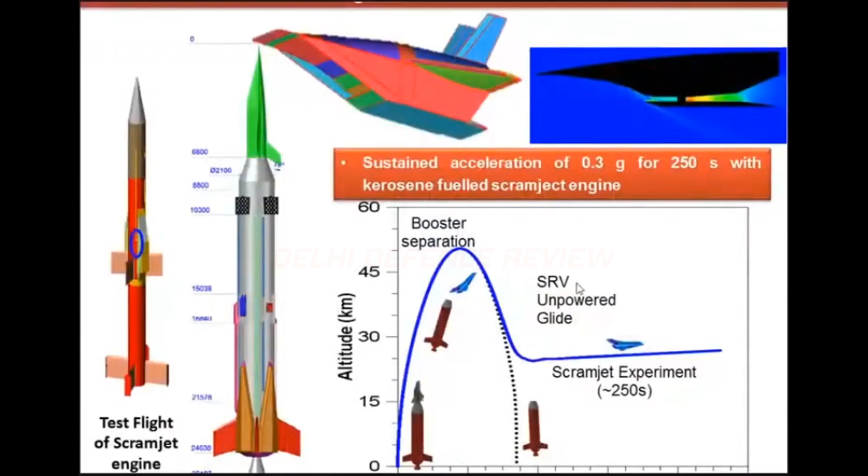ISRO has also been working on an airframe integrated scramjet engine called HAVA. It'll be an integrated scramjet engine and will be tested sometime in the next few years. It'll be a lifting body hypersonic vehicle boosted by an Admire booster to an altitude of 44 kilometers, which will then glide down to 24 kilometers at Mach number of 6. The objective is to demonstrate an accelerating flight of a hypersonic vehicle with scramjet engine power from Mach 6 to 7 in 250 seconds at constant dynamic pressure.

The final aim is to design a two-stage to orbit system powered by an air-breathing combined cycle engine. The HAVA will use a hydrocarbon-based fuel, ISROsene. System engineering and design for this has been completed apparently. Fabrication of the heat-sink version of the scramjet test combustor, configuration of the air intake cowl opening mechanism, and effervescent ISROsene injector was also completed. Hot test of gaseous hydrogen gaseous oxygen based dump igniter has also been done. A successful flight test would enable a full-fledged RLV design to get going finally.